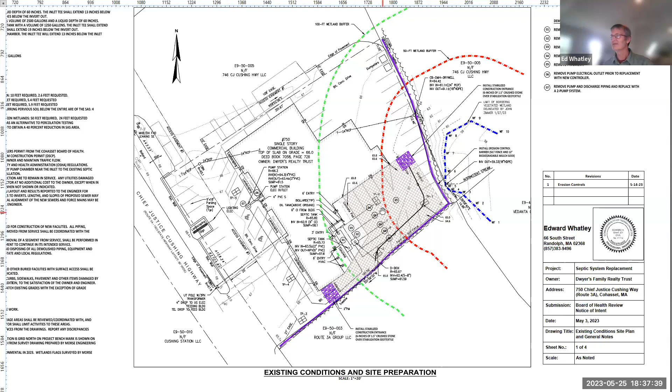And so, you know, we did run into lousy soils here, refusal at low and high groundwater over in this spot. And that's kind of why we were led down the road of locating the system basically in the same location that it's at now. And I'll just skip to the proposed.

In the proposed system, we're planning on replacing all the tanks. We're going to be adding a grease trap because there is a kitchen element in the butcher shop—not much, but enough that Pam asked us to go ahead and supply one. We're also using a Presby system, which is a method of enhancing the treatment. So that's basically it in a nutshell.

As far as erosion controls, there's potential for tracking on and off the site, so we're going to have stabilized entrances. We'll also have silt fence with a biodegradable compost mulch sock along the edge. That's it in a nutshell. I'm sure you'll have questions—I'll be happy to answer them.

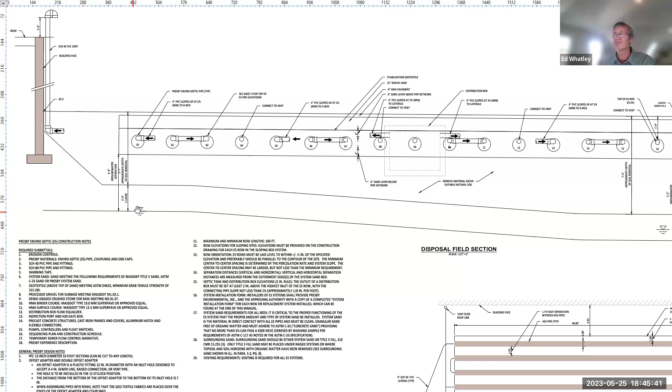In both locations. This part of the profile is up against the south wall of the building, and the groundwater is a bit higher there, then it drops as we move south. So we do have good depth.

As far as constructing the system, it has to be fairly deep in that it needs to support traffic, and so we do lose 16 inches of asphalt and gravel base.

So we did have to lower the system a bit, but in the end we have a little over 5 feet of groundwater separation on the lower end, and then 4 foot 4 inches on the upper end.

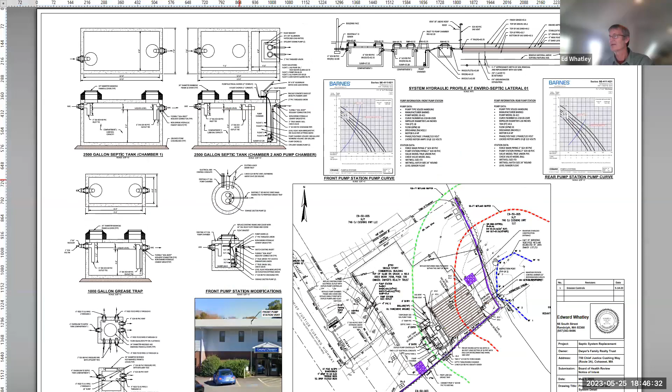Sorry to interrupt, but my concern is that the wetland's extent would represent the high stand of groundwater in the neighborhood, right? Otherwise it wouldn't be a wetland. And the contours here seem to indicate it's higher than you've estimated in your test pits.

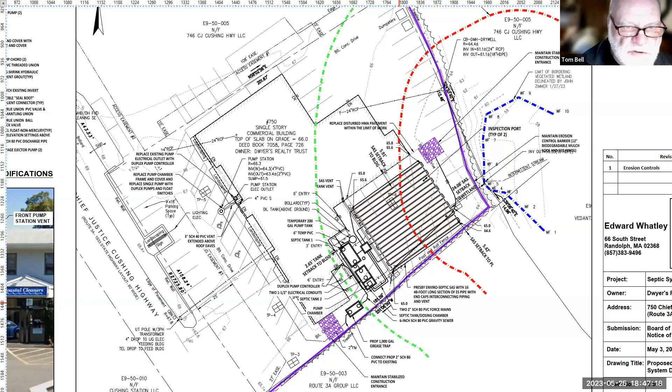Let's take a look. We've got a contour of about 60 and then 59 in here. I'm always suspicious when I see wetland delineations cross contours - that's not entirely realistic from a groundwater perspective.

Yeah, it's really a flag-to-flag line. I know all the compromises and hazards involved in using plants and very shallow estimations of whether you've got a hydric soil or not.

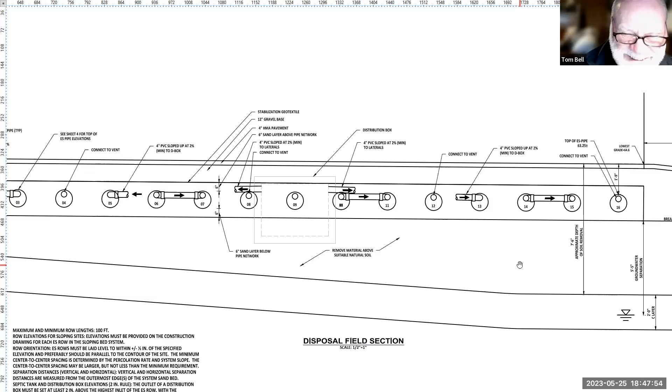But the fact is that water tends to be parallel to the surface of the earth, and if it's at a specific elevation in one place, it's got to be pretty much the same within the perimeter of that wetland delineation. We see this all the time, of course.

But in this specific case, it does not. I'm uncomfortable with your separation here. Do you have any pictures of your test pits? I didn't get a chance to read who the evaluator was or what they found. Did you do the evaluation of the pits?

Yeah, I did the evaluation. Phil Spath was on site with me - he's with the Board of Health, hired to oversee the test pits and shadow the soil evaluator from the applicant.

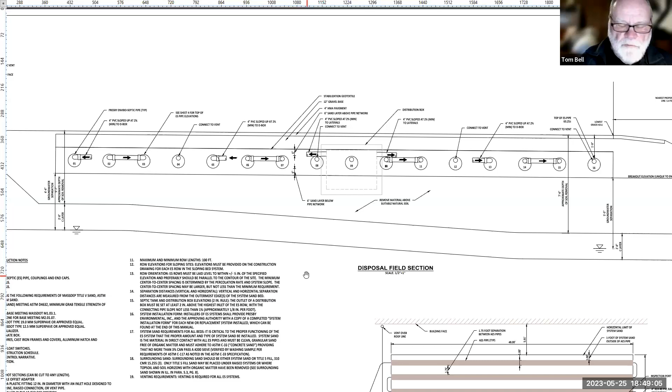I can pull up photos if that's helpful. You show a gradient here on your cross section - you want to go back? It's still there. You show a gradient in the water table here.

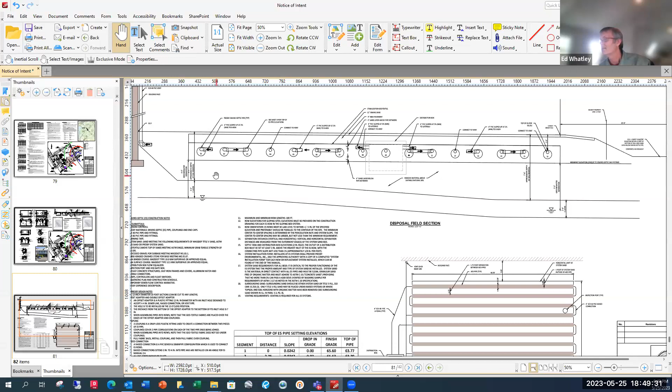Over a distance of - what is it from left to right here? About 40, 44 feet from end to end. And this elevation represents the groundwater elevation found in test pit 6, and this one represents the elevation in test pit 1. So what's the difference in elevation between the groundwater at one end versus the other?

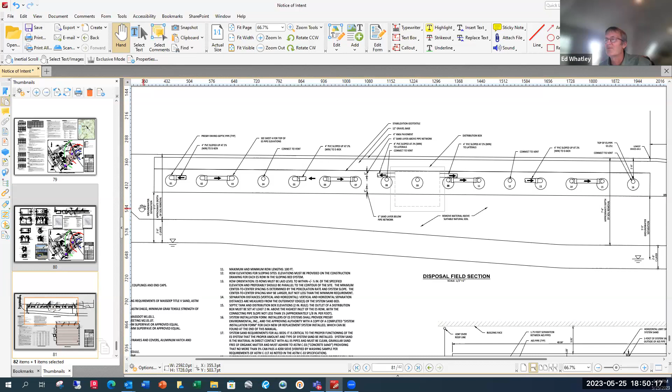If you could zoom in - I'm just estimating, it looks like about a foot. You've got numbers there, don't you? Yeah, there's a bit of a slope in the grade, but we've got about 4'4" separation from bottom of the field, to about plus 5'5" - so it's about a foot difference.

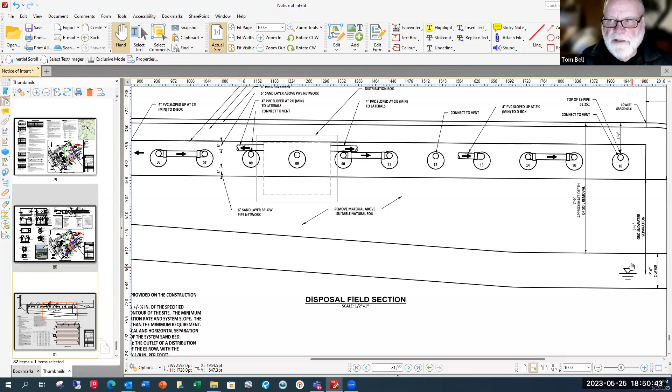I think we should be concerned about the separation here. I don't think you have as much separation. Either you have too little on the left side or too much on the right. That's a fairly substantial gradient over 40 feet.

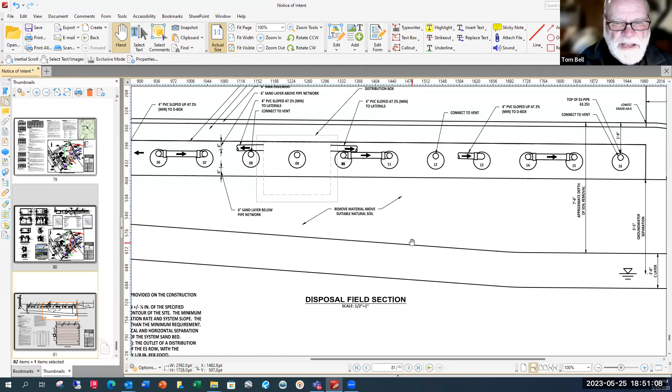Did you say the length of this is 40 feet? Yeah, that's like having a coffee cup on a table where the coffee's higher on one side than the other, if you will. It's basically just where we found the groundwater. We're not trying to represent this as a perfect gradient, it's just where we found it in this test pit, and where we found it in this one down here.

So 6 versus, I think it's 2. This elevation down here, at 6, we found the groundwater elevation at about 58.7, which jives pretty closely with what we're seeing in here. Yeah, and that's what we'd expect here. Moreover, it would probably be 58.7 across your entire site here.

Well, it is paved, so there's not a lot happening in here, nothing really going into the ground. But everything surrounding it is feeding into that groundwater. The water table over an area like this is flat as a table. That's the word, water table.

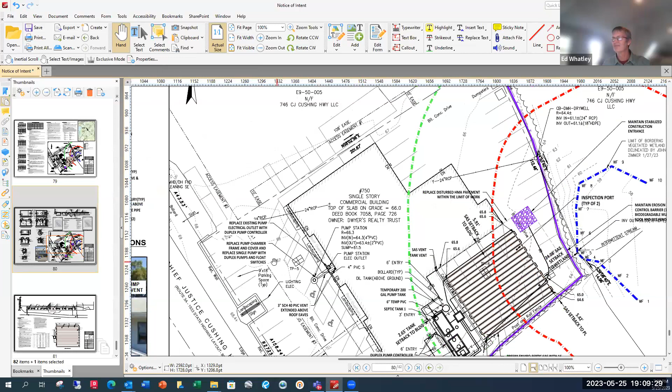Which would be an elevation of 61.1, pretty close, huh? Well, no, that would actually be about 63 and a half, but there's... I mean, you've got a building that I had heard from one of the sons they had to actually blast to get it in. So yeah, there's other stuff going on down here that is kind of toying with the groundwater level.

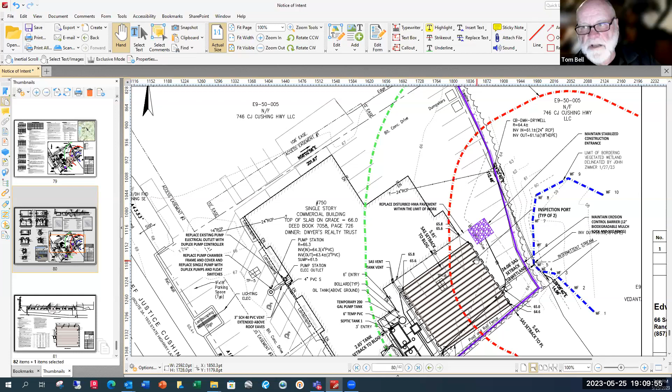We're coming off a hill. There's another Title V system over here. And so we might find higher groundwater here because of what's happening here rather than here. Well, looking at the contours, I mean, you are sitting on a high. The building is sitting on a high, it looks like, a slight elevation. And then as you move to the northwest, you drop down closer to the elevation of the wetland, within about 2 feet of it, actually.

So there may be a groundwater mound out there because of other infiltration chambers. But I'd still like to see at least some test pit, if it's only one in the middle of that big parking lot, but still outside of the 50. And we're so close here.

I would say leave it open for 5 days and then measure what the groundwater actually is. Mottling is a very imperfect way of determining the seasonal high groundwater. Very imperfect. Some soil mottles and some doesn't. If it doesn't have much iron in it, it's not going to mottle.

So Tom, you're suggesting further investigation in this area? Yeah. Let's see if we can actually determine that the area you've just drawn, Chris, is less suitable than the one being proposed, then we can move forward. But until we've condemned that area, until the engineers have condemned that area for one reason or another, I mean, I'm in favor of giving a variance here one way or another. But let's at least give it for the area with the least impact.

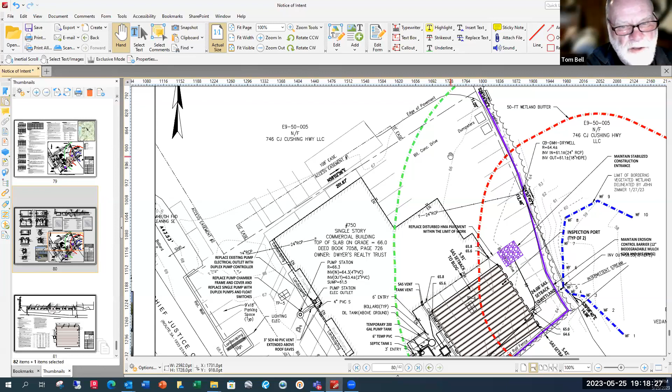I would suggest that if you can't keep it open that long, stab some perforated 4-inch PVC pipe in it, throw a little gravel around it, and wait a few days so we get an accurate measurement. We are close enough to the wetland here and the buffers that we need to find the best solution. We're not going to find a good solution, but we can find the best one, I think, with a bit more work here.

Ed, our next hearing is June the 8th, and the one after that's June the 22nd. I'd like to continue to one of those hearings. How much time do you need?

I'll have to schedule this with Pam and the excavator, so I don't know if we'll be able to make June 8th, but yeah, I'll try.

Well, let's agree to continue to June the 8th, and if there's a problem, you just let Charlotte know and she'll push it to the 22nd. Okay, all right.

Very good, thank you very much. Thank you, you guys.

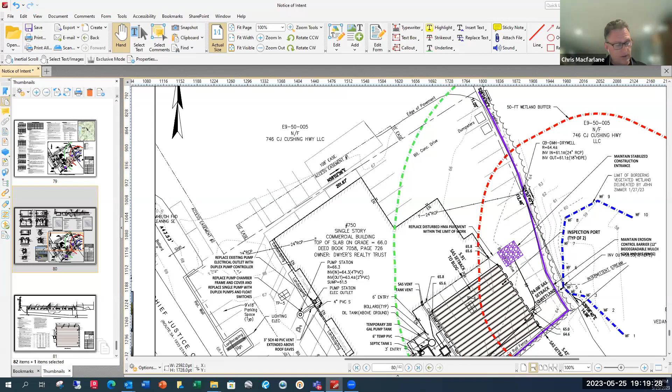Our next hearing this evening is also new to us, at 164 North Main Street. I'm going to read it into the public record. In accordance with Massachusetts General Law, Chapter 131, Section 40, the Cohasset Wetland Bylaw, Cohasset Stormwater Bylaw, the Cohasset Conservation Commission will hold a public hearing on Thursday, May 25th, 2023 at 6:30 p.m. via remote participation on the Zoom platform for a stormwater permit 23-09 from Hillary Moan to construct an attached garage, raised deck and stairs, and other hardscaping at 164 North Main Street.

Good evening, can you hear me? Hi, yes, yes, hi. So I believe we also have the builder here, Brian Greenberg. If you could promote him. Yes, thank you. Thank you. Okay, all right, so good evening, everyone.

This is a proposed addition to the single-family home at 164 North Main Street. Can I ask you to state your name for the record please? Oh yeah, my name is Xander Orm, Merrill Corporation. Thank you. Okay, sorry about that. And I have to share my screen.

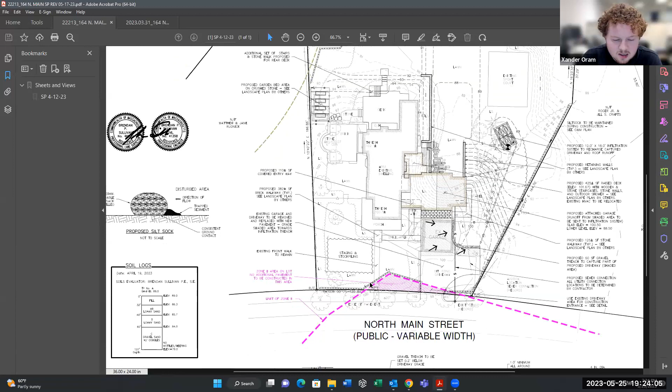We did a test pit at the location of the stormwater system and found very good soils, nice gravel and sand, so we expect a good infiltration rate. I believe that's it from me. If there are any questions.

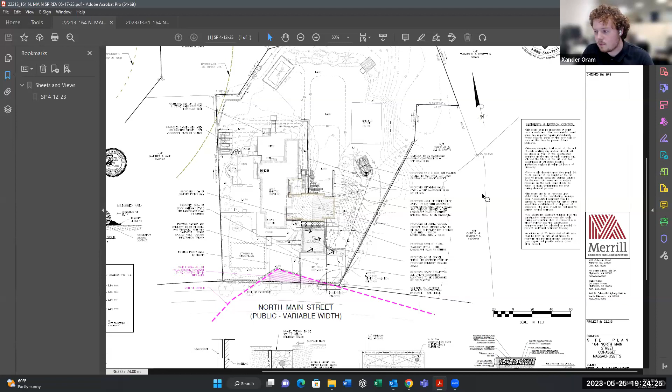Could you zoom in somewhat near the infiltration area? Not too far, just... Sure. Okay, is that good?

And what is the square immediately above that? Oh, that's a sports court, they have a sports field currently. It's like a basketball court. Yeah, no change proposed to that.

Do you know when that went in? Not personally, maybe the homeowners could answer that. They're here—believe it was previous to them owning the house, but Kerr or Hillary may know. Yeah, it was here when we bought the house in 2019. It was already installed.

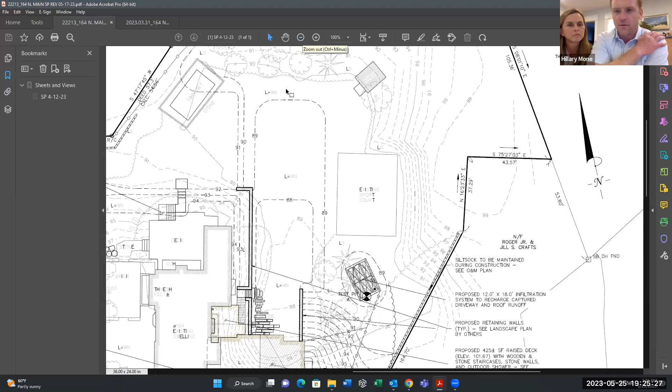So it looks like there's some trees there. Are they going to stay in place basically? These trees by the system, yeah, I believe the homeowners would like to keep those ones. Great, I think we discussed that.

Although you have a lot of grading going on there. There is a good amount of grading here, but if I zoom in, you can see it's about the same slope as before—we're not increasing the steepness at all. Yeah, but you're not going to be able to change the alignment of the grades without impacting the vegetation, nor can you dig your infiltration system without impacting it.

This is Sean Papich, Sean Papich Landscape Architecture, 222 North Street. There is going to be grading right in that area, and those particular trees are intended to be removed that are right near the infiltration trench. There's already a large low depression in that area, so it's actually serving perfectly for where that infiltrator is right now. But as you can see, right in that area with proposed grading, there will need to be some removal of those couple of pines in that location.

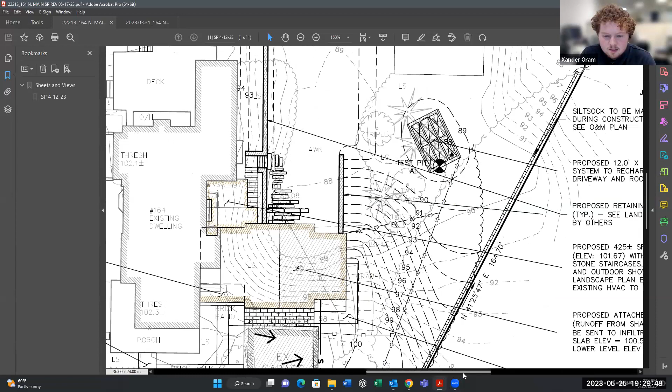No other comments, questions? How big are those pine trees? I'll have to look at that more closely, but there's nothing more than 12 inches being removed on site, so I can tell you they're definitely less than that—I don't think they're anywhere near that. Yeah, okay.

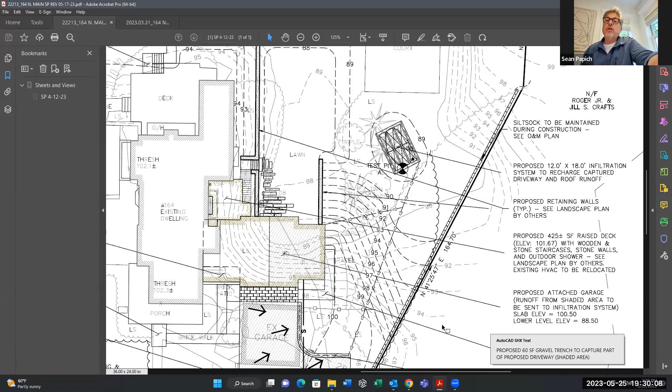We're proposing evergreens along the property line, as well as some newer river birch to replace the one we're removing.

If there's no other comments, I'll make a motion to issue a stormwater permit 23-09 at 164 North Main Street.

Do I have a second? Berrigan, second. Having a motion and second to issue stormwater permit 2309, take a roll call vote. Tom Bell, aye. Kathy Berrigan, aye. Chris McIntyre, aye. Chris McFarland, aye. That vote passes 4-0.

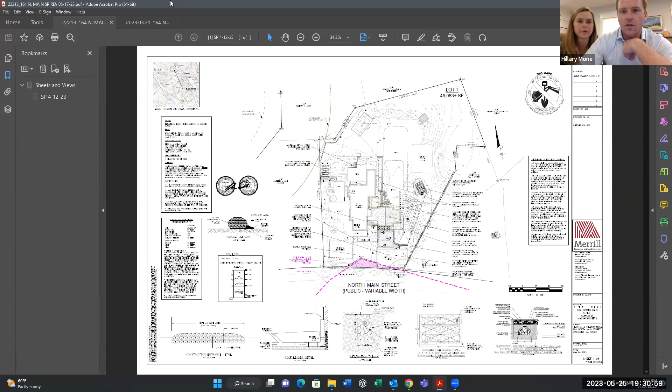Okay, our next hearing this evening is also new to the commission. I'll read it into the public record in accordance with Massachusetts General Laws Chapter 131, Section 40, the Cohasset Wetland Bylaw and the Cohasset Stormwater Bylaw. The Cohasset Conservation Commission will hold a public hearing on Thursday, May 25, 2023 at 6:30 PM via remote participation on the Zoom platform for notice of intent 23-15 for the town of Cohasset's DPW and engineering to present Government Island Wharf improvements at 15-19 Lighthouse Lane.

So the other folks just pulled up their plans. I have history and alternatives in a presentation. If you want me to just start like that.

Sure, could you start with your name and your affiliation? Yeah, I am representing the town of Cohasset. My name is Jimmy Hill. I work for Foth Infrastructure and Environment.

Jimmy, you can share your screen if you like, if you want to pull up the site plan or any other documents you want to share. Sure, I'll just go through a presentation. I'll pull up my site plan. Okay, thank you. Everybody can see the screen. My pointer, I'm going to minimize this.

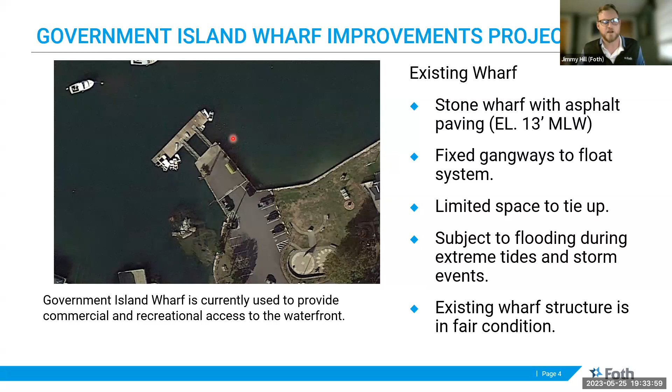The wharf in today's condition is comprised of the original stone wharf, two fixed gangways that anchor the float system. Currently, there's only one berthing space along the wharf itself at high tide. The wharf is also subject to inundation during events that combine a high tide with nor'easter driven storms. These events render the facility sometimes unusable. During low tides, rock obstructions in the wharf vicinity hinder vessel access. Primary use of the wharf is commercial fishing, but it also supports recreational users.

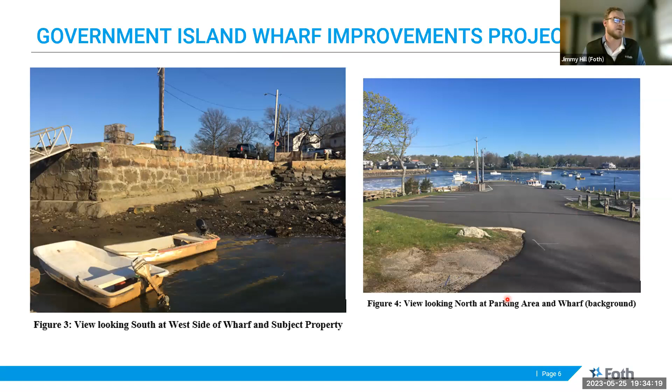Some images of the wharf in today's condition. See the two fixed gangways here, the small float system. Another view from the float system here as we look south at the west side of the wharf and the subject property, and this view from the parking area.

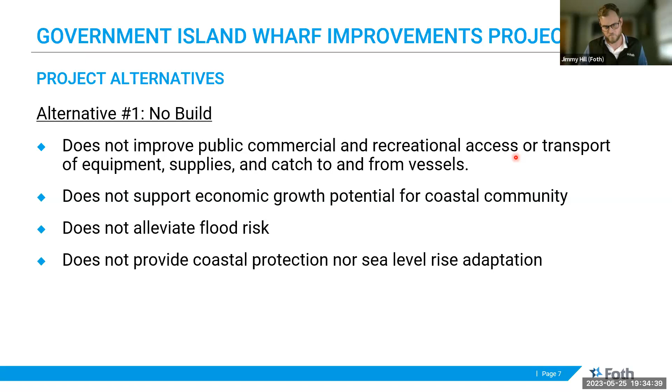The first alternative we went through was the no build. The no build scenario does not alleviate the flooding that occurred, nor does it alleviate the potential for damage and resulting debris caused by flooding. This alternative does not support Massachusetts climate resilience and sea level rise adaptation efforts. Based on the above conditions, the no build was not considered viable.

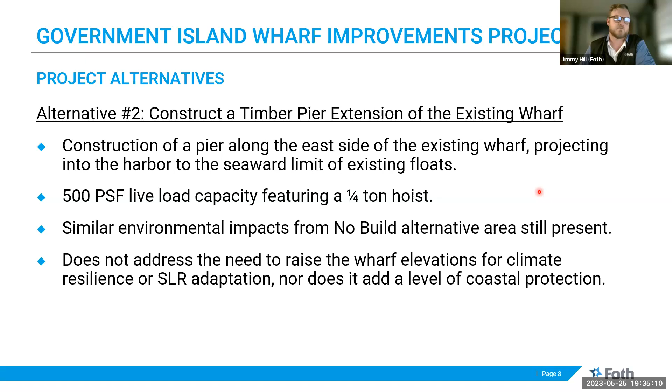The second alternative we considered was to construct a timber pier extension adjacent to the existing wharf along the eastern side. Similar environmental impacts as the no build alternative result from continued flooding during coastal storm events and high tides. Under this alternative, the wharf would remain at the existing elevation and grades, which does not address the climate resilience or sea level rise adaptation needs.

So the final proposed alternative that we submitted with the notice of intent is designed with current and future uses in mind and minimizes impacts on the surrounding environment. In this alternative, the wharf will be raised about 3 feet by constructing a concrete retaining wall set on top of the current wharf, filled with structural fill, and repaved to an elevation of 16 feet mean low water. The timber pier extension, supported by steel pipe piles, would be installed to the north and west of the wharf with deck elevations to match the 16-foot mean low water wharf.

New floats, a larger ADA accessible gangway, conveyor system, and two quarter-ton jib cranes would be installed to improve facility use and access. This alternative also addresses climate change and sea level rise concerns using the Massachusetts Coast flood risk model for the 2050 planning horizon.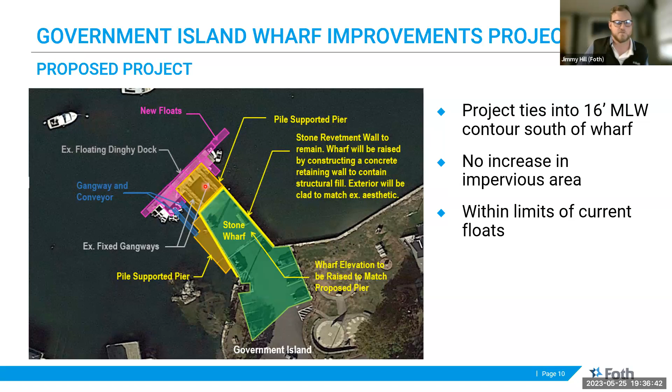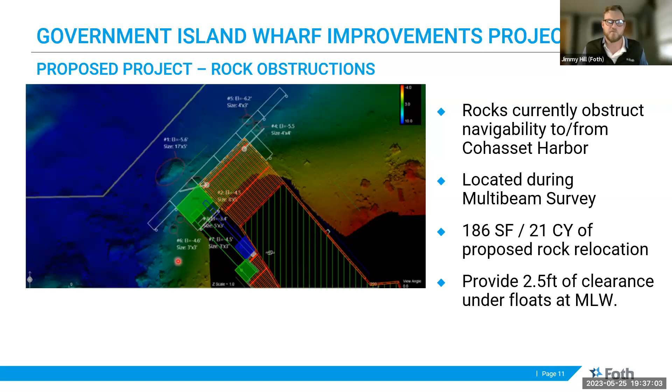The harbor master had noted several rock obstructions limit access during lower tides. As part of the project, the rocks are located using multi-beam sonar equipment. A total of 186 square feet of rock, amounting to 21 cubic yards, would be relocated to a nearby area west of the wharf to provide better access to boaters and give the floats 2.5 feet of clearance at low tide.

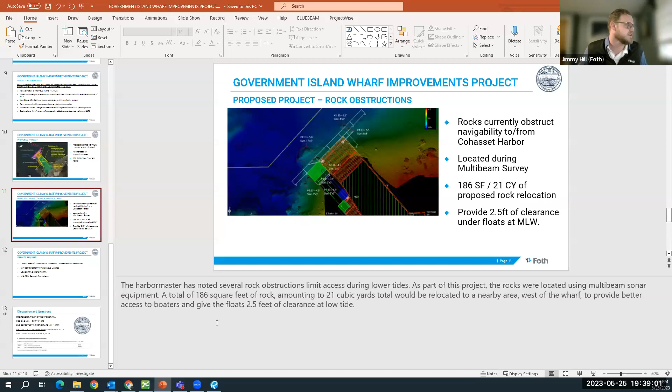With respect to the rocks, how do you know they're rocks and not attached to bedrock? The multi-beam data showed - you can kind of see right here it might take a little bit more investigation, but the rest are kind of just pocket rocks. The site photos, this one in particular, kind of show you what's going on out there in terms of those rocks. A lot of it's just kind of scattered.

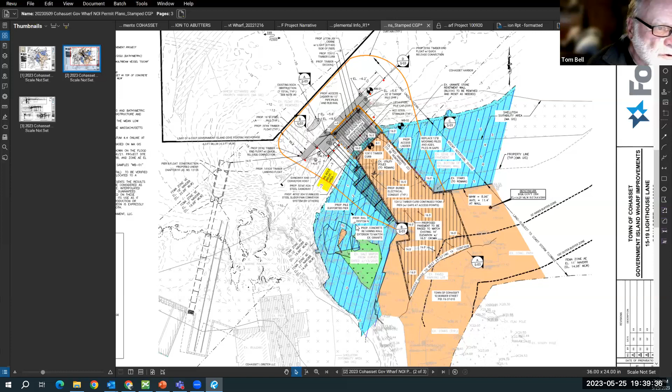I'm sure you're aware that the rock on the north side, or east side of the structure, is quite large and it's clearly bedrock. Correct, yep, we're aware. So how are you going to deal with that if, for example, the one at B S-03 is in fact a bedrock outcrop?

This one right here that I'm highlighting? Yeah, that one. I think we may need further investigation, and it could be removed with an excavator or crane potentially. Well, you're not going to lift it out if it's an outcrop - you're going to have to chip it or blast it or something.

To reduce its size or elevation? Correct. So we proposed maybe a hydraulic ram then, in the case of harder rock like that, bigger pieces that can't be picked up, where we could break it into smaller chunks. I don't see the benefit of blasting out here. We didn't really talk about that too much. That's a tough one.

So if you raise it 3 feet, the gradient of those walkways is going to change a lot. Correct, and we looked into the slope of the gangways at maximum low tide. That's actually why we increased the length of the gangway to, I believe, 50 feet. We had secured one that was 40 feet, but it was kind of too steep, so we ended up with the 50-foot gangway.

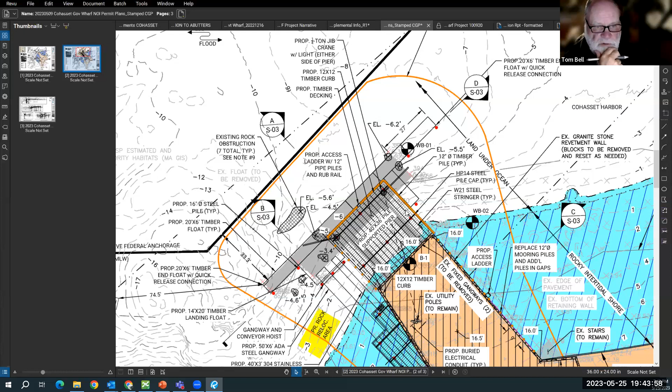I don't know whether you're aware, but on that northeast side of the pier, this is where the lobstermen haul their boats at high tide and prop them against the existing seawall to do maintenance. So if you have that extension there, I guess they'd have to remove it to be able to do that during the winter when they do it?

No, not necessarily. This face of the wall, the wharf right here, is going to remain about the same. We've proposed a few additional mooring piles there so that they can still use this section. In the photograph, it's hard to see, but this vessel is adjacent to the wharf, tucked into this part by the parking lot. It's about right here, but there's not really enough space right now for more than one boat to do that. This gives it a little bit more room, maybe two of those size vessels can fit here.

Yeah, but what I'm looking at is the approach to that, if the float is extended to the northeast, then how do they actually get in there? I believe you just have to come around it. And if it's an issue with the users, then I think the harbor master would be happy to break that.

Yeah, so it can be removed so that during the winter those guys can get a straight shot, because it's a tight spot and there's a big rock there, a big outcrop they obviously can't land their boats against. There's just a narrow, maybe 10 or 15 feet of gravel between the northeast seawall and that outcrop, and they don't want to set their keels on that outcrop. So they need to come in there parallel to that seawall. They can't come in and make a sharp turn into that.

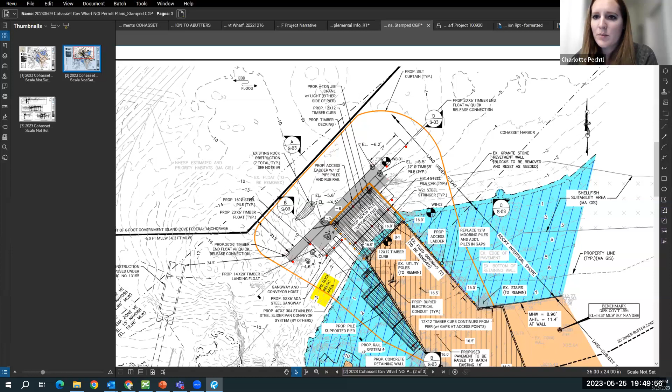They also were given copies of the site plan as well. We did encourage them to come to the meeting. I don't know if I see anybody on the call who we saw at the docks, but we did encourage them to come to the public meetings, and it'll also have to go to select board too.

I think those pilings would be an easy thing to miss with all that's going on in this diagram, right? Like typical engineering drawings we get, there's a lot of stuff on it, and if they're not accustomed to looking at an engineering drawing, they could very well overlook the fact that there's suddenly going to be 3 new pilings out there that they've got to somehow thread the needle to get back into this only place where they can really maintain their boats.

So I would go so far as to say that these should be pointed out to them and ask them what they think, not just 'hey, look at the plans, do you approve?' What happens if we put these 3 pilings in? I think you might get some useful feedback from that.

Okay, yeah, I'll comment that Lori Gibbons, the harbor master, has been going back and forth with the community there for years, maybe 5 years or so. This plan came from 'let's utilize this space, let's not encroach further out towards the anchorage, we're adding more space, more features for folks to use.' So maybe that had been missed, but the design was only intended to add more space and not to limit the uses of this wharf. It's really intended for folks to use it to make money.

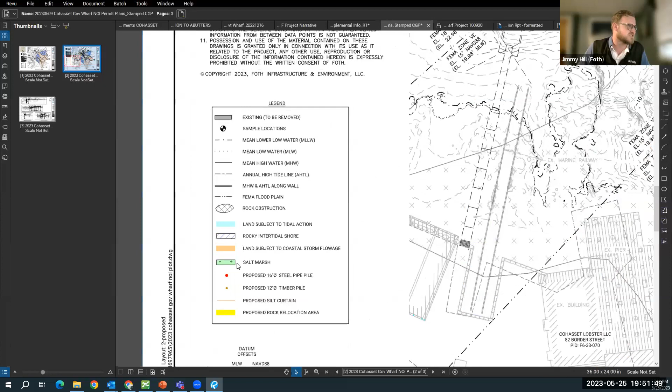So is the tan color all asphalt or is that just terra firma? This tan color we're using to show the land subject to coastal storm flowage within the project area.

Okay, so what is the limit of the area that's being raised? The limit is this cross hatch here, the slanted hatch. And does it all have a perimeter wall around it? I believe there's proposed to be a small granite-topped curb through there, which will kind of extend the aesthetic of the top of the concrete, or the top of the wharf retaining wall.

Those words don't quite work together - the granite and the aesthetic of the concrete. It's not my purview, but it couldn't be a worse thing to do to the harbor of Cohasset than to put a concrete wall on top of a 200-year-old granite wharf. Whoever proposed it should be ashamed of themselves. They could face it with granite - they could use granite, how about that? They could do that too.

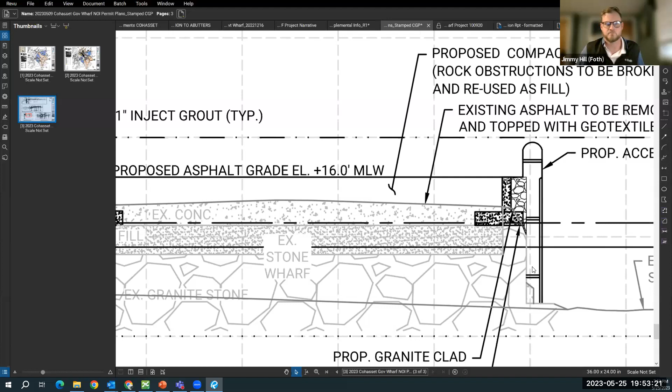So this cross section here shows the retaining wall with granite clad on the outside to match. Okay. And yeah, the idea is that the retaining wall holds the structural fill, sends the loading force inward rather than out towards the wall. Okay, full reconstruction of the wall.

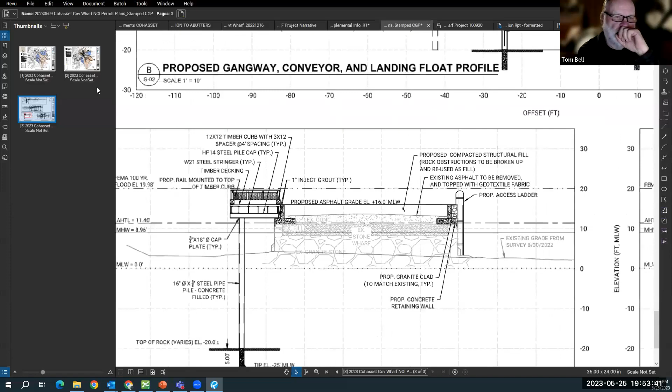Go ahead. So going back to the plan where you said there would be a small granite curb, the intent is that there is still circulation between the parking lot and the adjacent property, is that correct? By circulation, like people can walk from the park to the parking lot and back and forth as they currently do. Right.

Well, is that really the case? Because you're 3 feet higher. So what happens when you get to that edge, how much higher are you going to be? Right, okay, I see what you're saying here. Yeah, so there needs to be an access.

There needs to be a step down, or 2 steps down. Well, it can't be steps, it has to be handicap accessible. I mean, even the lobstermen take their dogs and play in the park here, and vice versa. People come from the park and they walk out to the wharf.

So there needs to be some accessibility. Okay, understood. I mean, if you had a long step, then this maybe came out several feet and had tiers down, and you're saying handicap accessible as well. So we need to incorporate a smooth path up.

Yeah, I assume since this is a town project, that eventually it's not just the fisherman's wharf which would become improved for resiliency. The community boat club would be the same, and the rowing center would be the same. It would carry all the way down. But in the interim, if it's going to be done piecemeal, then it shouldn't...

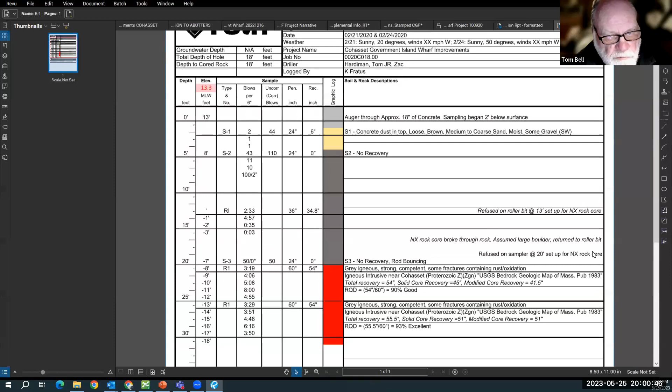Okay, so was this auger coring or augering down? How did you drive it? Split spoon, 5-inch, you did rock cores. Split spoon sampling through sediment, then switch to diamond drilling to get core? Yeah, that's correct. Roller bit, 5-inch rock coring was performed.

Okay, 2020. Let's see what else we have. And then on the wharf itself, there was some test boring done as well, which determined that underneath the asphalt and poorly graded sand, there were some broken up pieces of granite.

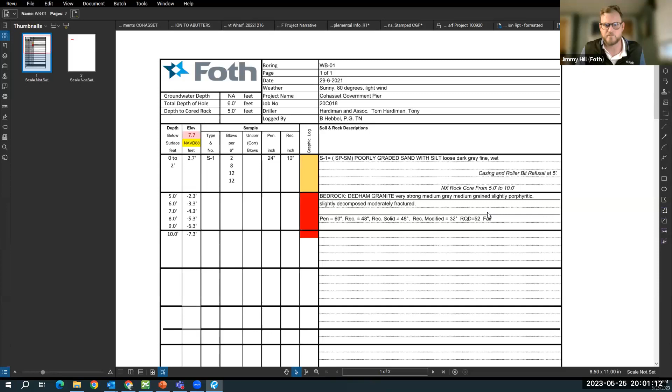Can you comment on the wisdom of sealing the seams between this gravity stone wall, cutting it off from natural groundwater drainage? Don't we have an issue with groundwater damming behind these walls that have had shotcrete, plugging them up so you've got hydrostatic pressure at low tide? I know all of these have been grouted. It just seemed like a really bad idea to me.

We did have an inspection done of the current condition of the wharf, and it was determined to be in fair condition. So the structural engineers designed this with that in mind. So you don't think the damming of groundwater behind all that grouted stonework, creating hydrostatic pressure at low tide, is an issue?

I can get into that with the structural engineers. I guess the possibility exists for that. It just seemed like a bad idea to me, damming up groundwater behind these walls by sealing them. It didn't add any structural integrity to them.

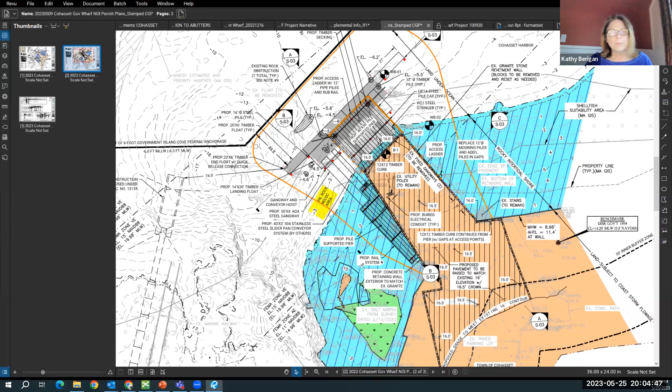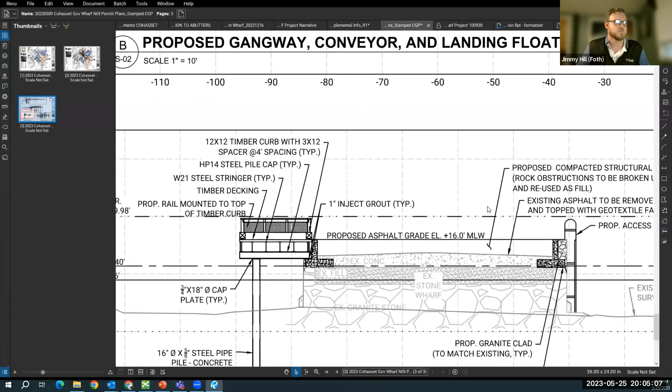So just some compacted structural fill. What does that mean specifically, like concrete? I think we'd use like, yeah, concrete or some sand rock. Probably, it's probably going to be a graded crushed stone. Thank you. Okay.

So all of these are elevations referenced to NAVD 88, is that correct? I just mean, Joe, mean low water on the plans. It's mean low water. I see. Mean low water.

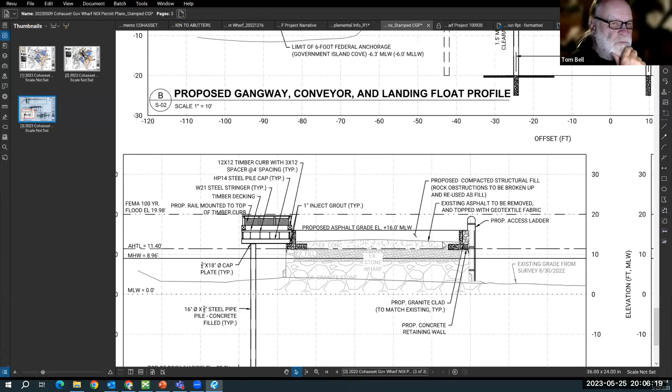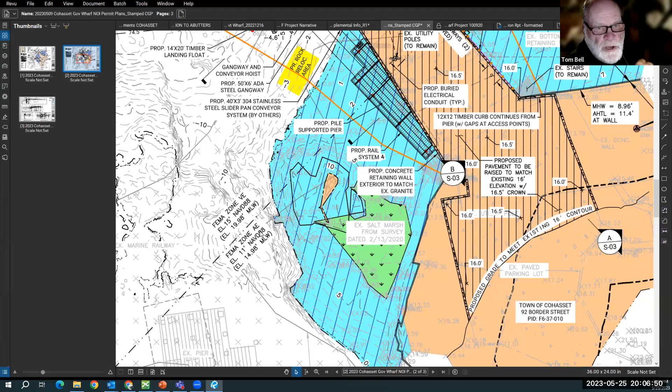Okay, so if these other elevations on your map are referenced to mean low water, then this doesn't make a lot of sense, because you're going to be at a lower elevation than the velocity zone. Well, there's not much higher than you can build. You can't build a 20-foot tall structure out there and have the gangways still work.

Again, you're using two datums here. One's mean low water, one's NAVD 88, and they need to be consistent, I would think. We're concerned about this being above the velocity zone, right? And at 16 feet, that would be the elevation. If the elevation would be another 5 feet higher relative to mean, essentially, if you subtract 5 feet from all those 16s and 16.5s, you're down at 11.5.

So you're lower than the elevation of the VE zone. There's only a certain extent that you could build to before. I mean, you want to be at 16 feet NAVD 88, right? You want to be a foot or so above the velocity zone, but you're relating these to mean low water, which is lower in elevation than NAVD 88. NAVD 88 is approximately within half a foot of sea level. Mean low water is below sea level.

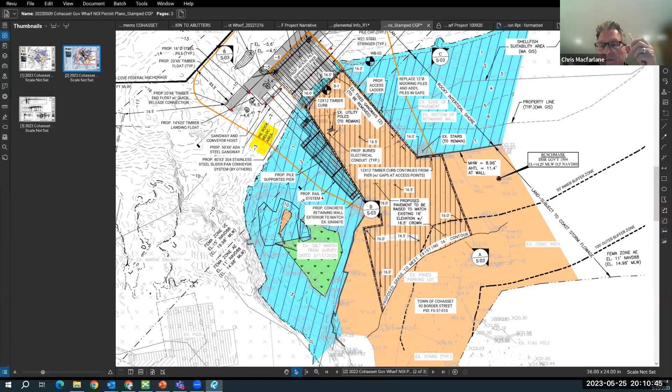So the existing contours are being shown from mean low water? Correct. The ones below sea level are, but what about the ones on the land, would the wharf be the same? Yeah, they are also. That's not right. You can't do that. Sorry, I missed that.

Well, your terrestrial elevation should be referenced to WGS 84 or North American datum, I can't remember the name of the terrestrial datum that all elevations are referenced to. These days it is NAVD 88, but historically they haven't been that way. So you're saying it's a little confusing to see two different datums on the same map.

I think the idea is that FEMA zones are spoken of in NAVD 88 terms. So we provided both, the mean low water, which is the plan reference shown in the datum chart to the bottom left, so that you can see the relationship between mean low water and NAVD 88 when we're talking about the flood zones, so that we can talk about our design.

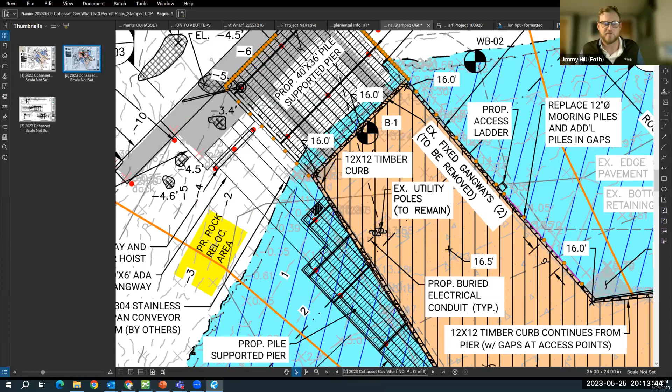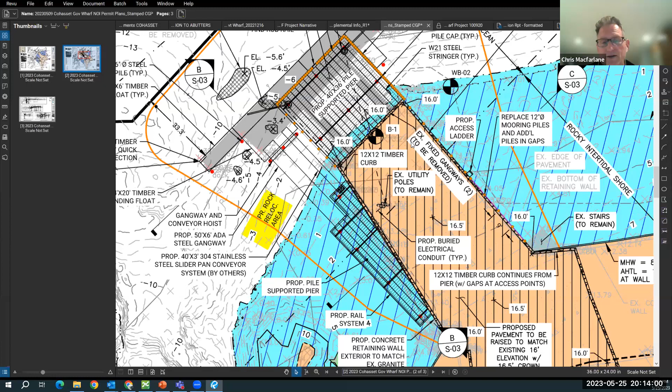From the top of the wharf, 13 feet down. I haven't stood down there myself, but looking at the photos, I'd think that's close to mean low water. I'm not saying that's incorrect, but if you stand at the end of the wharf and turn around, it seems like it's a lot more than 3 feet by the time you hit the road up above. It's got to be close to 5 or 6 feet.

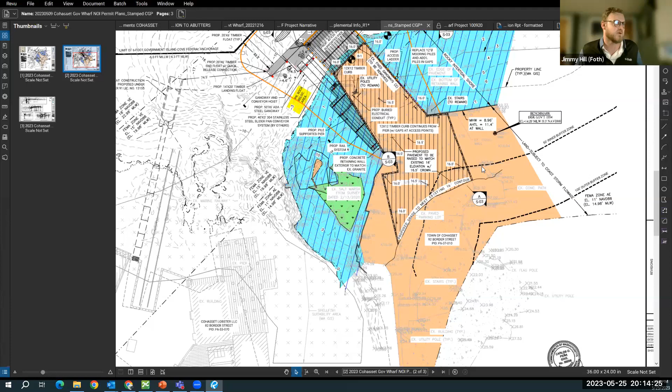To where, because right where it says existing 16, there's a road that runs up there. Right, a little further up the hill. Yeah, we're kind of going halfway through the parking area with that contour, so it is a little further up the hill.

Isn't the road right where that call out was? Isn't it right where that A is? Isn't that the road right there? These dash lines are the buffer zones. No, but see, you see a contour cut the other direction right there, see where it says existing concrete path?

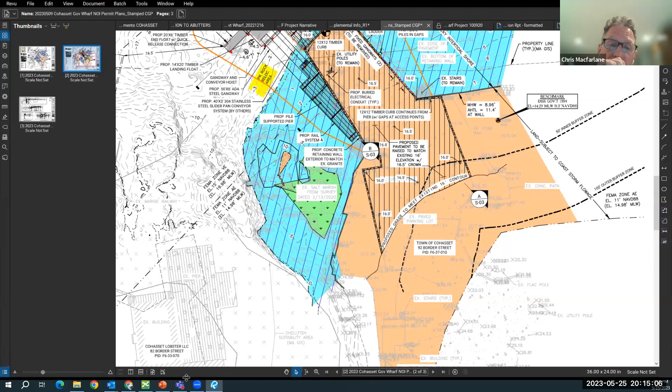Isn't that the road, or no? Sure, right, a little bit to the outside of this photograph, so I think from that 16-foot contour, it looks like it's going through here. So the bottom of that wharf, the seaward side, at least where the asphalt stops and it looks like there's concrete after that, is about 8.5 feet above sea level.

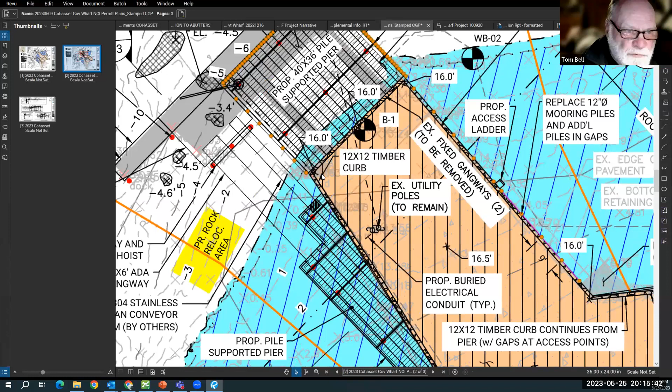A little bit farther back from that, maybe, yeah, right in there. That's about 8.5 feet, its elevation. Well, then that would make sense, Tom. If you add 3 to it, you're at 11.

Yeah, that's right. I know this is all driven by regulatory nonsense, but it can be confusing here. We're looking at elevations that are referenced to one datum for topography and another datum, in some cases, for the mean low water, which doesn't make a lot of sense, but that's just the way our world works, I guess.

It's found it's just easier to show both in scenarios where there can be questions and scrutiny like this. Maybe sometimes it aids the conversation. It appears here it didn't. I should have just left NAVD 88 off the plan.

Well, I'm glad you didn't, because I was under the assumption that we were talking about NAVD 88 and envisioned this at 16 and a half feet, and so therefore it was about 1.5 feet above the VE zone. In fact, it's underwater in a VE situation, quite underwater - like 4 or 5 feet underwater.

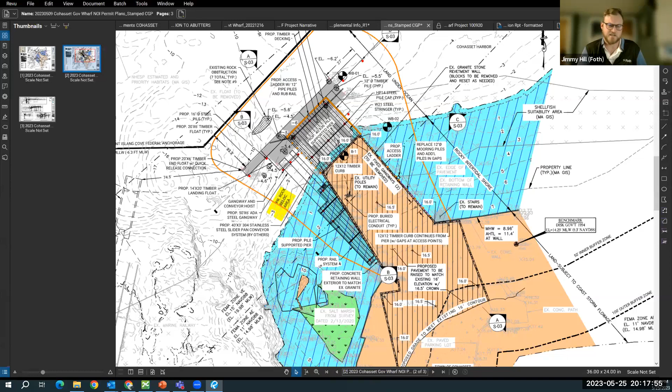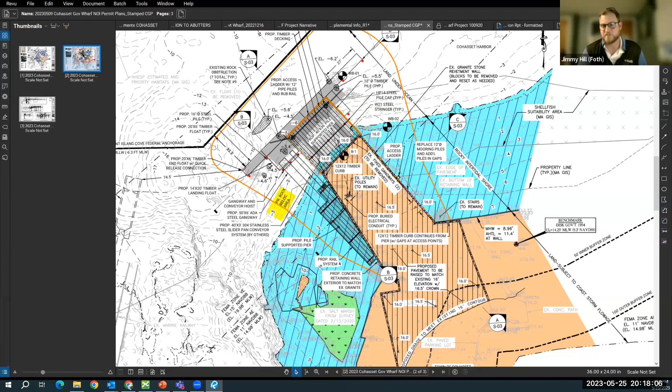Oh, it's not. I attended the FRM training - I'm not sure if you're talking about the same thing. But yes, of course, I looked at the models for this site, for all of my sites. It looks catastrophic when you really see it.

And that doesn't even take into account - well, the model does take into account, but in general we're looking at current conditions. 2050 is going to be a completely different story. So it's good to hear that you've left some ability to put additional courses of stone or raise the elevation yet again as necessary, and we all know it's going to be necessary. Right. Some people don't believe it, but I think most of us here in the commission do.

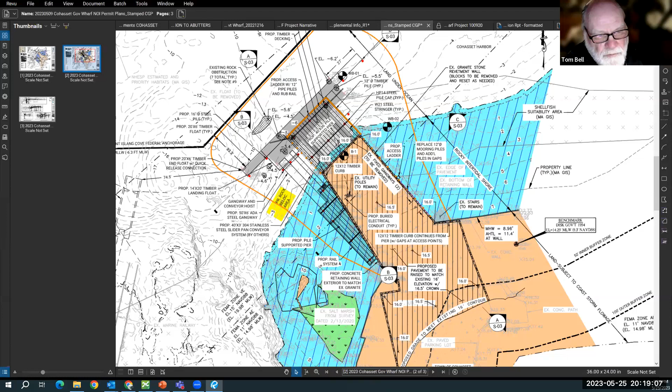Okay, well, I'm just happy - it all sounds very arcane, but I hadn't noticed that all of this was referenced to mean low water. So now we know.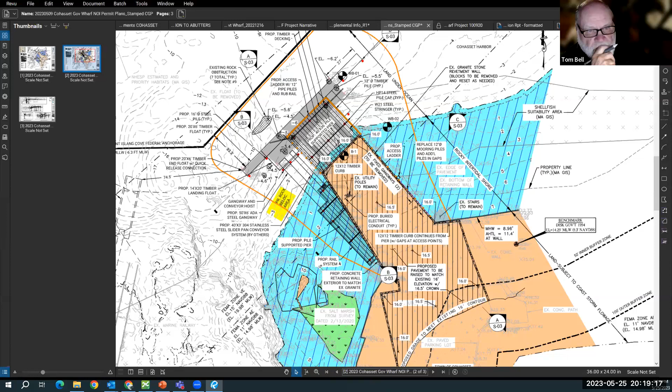Okay, so we all have a little bit of homework to do. I'd like to continue this hearing for NOI 23-15 until June 22nd. Is that okay with you, Jimmy? Believe so. Yes, okay, June 22nd it is. Thank you very much. All right, thank you.

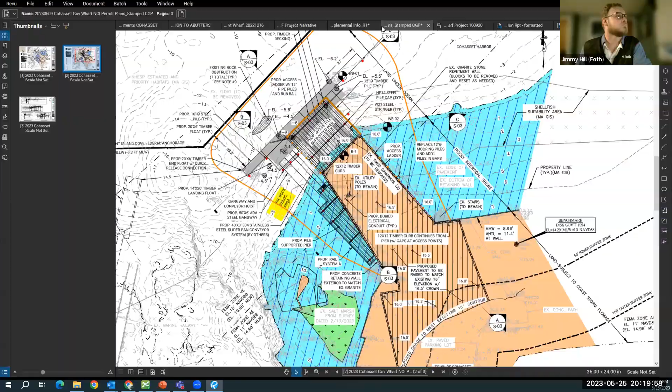Okay, our next hearing this evening is NOI 23-13 and Stormwater Permit 23-07 at 83 Spring Street. This was continued from May the 11th. This is the Juan property.

Evening, everybody. Good evening. Good evening. Good evening.

So I'd like to compliment everyone on being so civil last hearing. I thought it was a nice discussion. I'd like to start off this evening just by reading from Cohasset Wetland Regulations, Section 27A1, the inner buffer zone.

Inner buffer zones consist of not less than 50 feet, and serve a number of important functions in relation to protection of resource areas. These include providing a protective buffer between human activity and development and resource areas, and providing an area to absorb, capture, or dissipate eroded materials or pollutants coming from sources further upland, thus preventing or mitigating their impact on the resource area.

Providing flood and storm damage mitigation, stormwater control via water absorption capabilities of and protective barriers provided by trees and other vegetation, acting as a groundwater recharge area, and a protection area for water quality, providing wildlife habitat areas, travel corridors, and protection zones, providing aesthetic value and recreational value. The concern regarding activity within the buffer zone is the ultimate impact on the adjacent resource area during construction and subsequent use of the project.

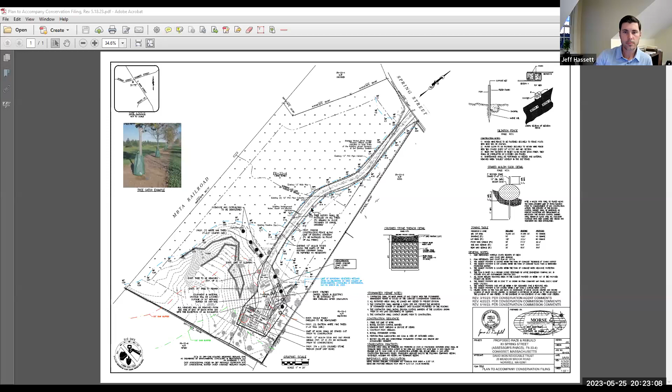So this is the plan that we submitted following the last meeting. We are now proposing the house entirely outside of the 50-foot buffer, which is that red line. We're at 63.9 feet from the wetland, as opposed to the existing house that's 25.3.

One of the big concerns we had was whether we'd have any issue with ledge when extending the utilities from the existing house back to the new location. That appears to not be an issue. We did 2 test pits, one located right here and the other here, on either side of the utilities, and did not encounter any ledge.

We also excavated a 3rd test pit in the back right corner of the house where the grade comes up, to see if we were going to have any issues with ledge in that corner. We got down deeper than the slab elevation without hitting any ledge, so there really should be minimal, if any, ledge removal for this project. So that was good news.

The other thing we talked about was the removal of this 30-inch tree. We had a driveway configured in a way that would have required it to be removed. We've adjusted that driveway, and now we're preserving it. With the alternative, keeping the existing footprint, we thought that tree needed to go because of the proximity to the house, but we're comfortable with it in that location.

And then lastly, we added additional trees in this area where the existing home is being removed - that home and deck are being removed, along with an outbuilding and an outhouse. In the location of those structures, we're proposing now 3 eastern white pines and a total of 7 white oaks.

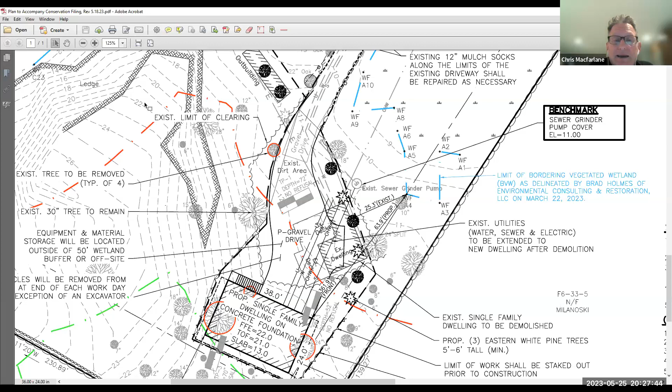Besides the trees, I think it would be wise for the area of disturbance, where obviously a big portion is the existing structure and the new driveway, but the area that's not should receive some sort of mitigation planting. In addition to trees, a seed mix, and shrubs—a shrub layer, ground cover layer, something to stabilize everything that's been disturbed over time. So in the area where the existing house is being removed, but beyond the limit of the driveway, we can enhance that further with a seed mix. Basically any area of disturbance, any area of concern.

So is the idea, Jeff, that all the contours on the left side of the house just run into the foundation? Exactly, yes. To elaborate, you have an existing 13 contour running right in front of the garage, and we have a garage slab at elevation 13. The foundation wall will extend up at a height—it will be variable, but there won't be any fill brought around it, it's just matching existing grade. What about the material that's taken out? It'll be put on a dump truck and hauled away.

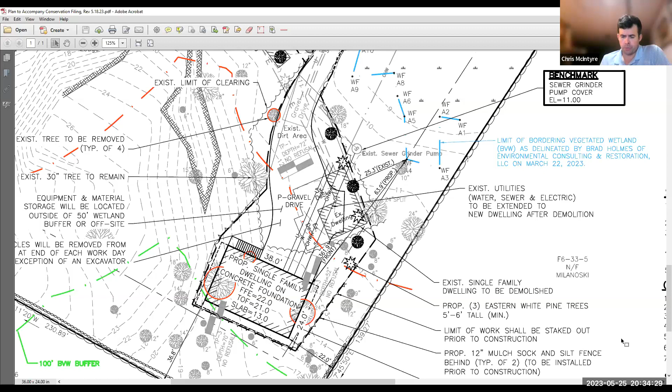And finally, I make a motion to issue a stormwater permit 23-07 for 83 Spring Street. Do I have a second? Second. Having a motion and a second, take a roll call vote.

Tom Bell, aye. Kathy Berigan, aye. Chris McIntyre, aye. Chris Macfarlane, aye. That vote passes 4-0.

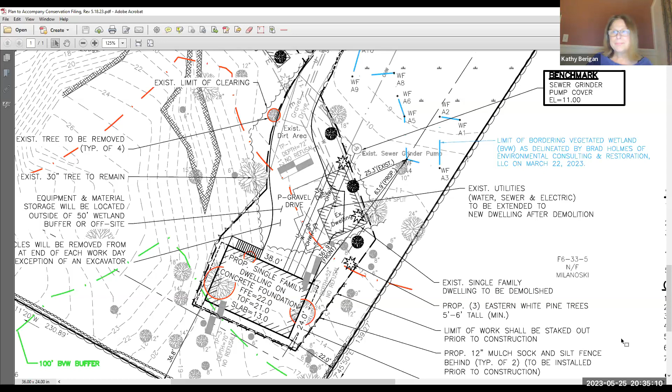Okay, Jeff. We seem to have one certificate of compliance for this evening. The other two have been continued. We have NOI 19-15 and stormwater permit 19-18 for 187 Atlantic Avenue.

Take it away, Charlotte. Yes, and we do have, I believe, the previous owners but current permit holders. We have Robin and Lynn Schwant on the call.

Following up from our last conversation about this COC, the commission had expressed some concerns about the drainage pipe going into the wetland. It seems to be a sump pump pipe, and there are actually two that the engineer has now located on the as-built, which I can pull up momentarily. We wanted clarification about the history of this pipe, if it was already existing on the site, why it was installed in this location, and if it's potentially possible to relocate it.

The other concern was removing some hydrangeas out of the landscaped area in front of the entrance, and those have since been removed. Also, to clarify with the commission, we're in the process of recording the long-term operation and maintenance plan for the stormwater management systems for this property. That will be done prior to the issuance of a stormwater permit COC, but they are prepared to take care of that. I can pass over to either the commission or the Schwants to see if they have anything else to add, but I believe those were our concerns from the last meeting.

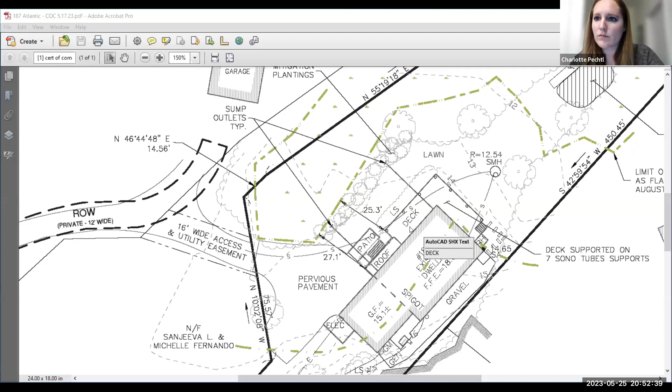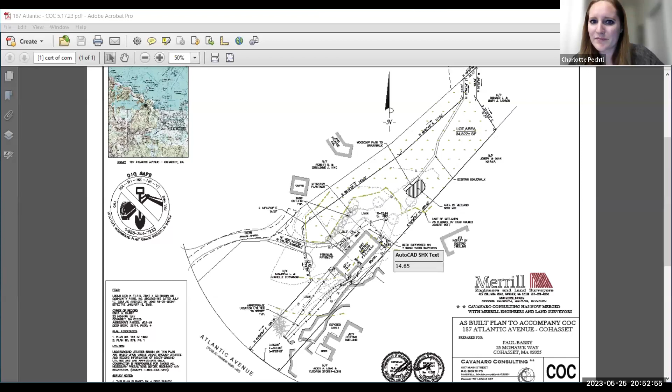Can you go back to the plan for one minute please? Yep, the as-built? Sure, okay. Can you zoom out? Yep. A little more, zoom out more? Yep, maybe, is that okay? Yeah.

Charlotte, I just want to point out that immediately adjacent to Atlantic Avenue is the area that was added to that area. Mr. Schwant, I don't know if you can comment on that.

Well, it was an attempt to get some vegetation and remove some low-lying areas that were holding seasonal stagnant water that was objectionable to our neighbors. So we did fill a couple low spots, and there was some thinly spread loam in an attempt to get some seed to germinate. It's probably too late now, the trees are gonna die in that area. It's more loam than you think, trees can't withstand that.

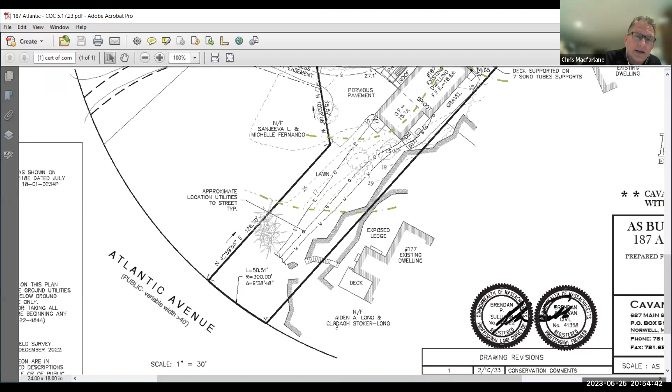The objectionable standing water probably was another wetland. It probably shouldn't have been interfered with. I mean, Charlotte, I don't know if you ever...

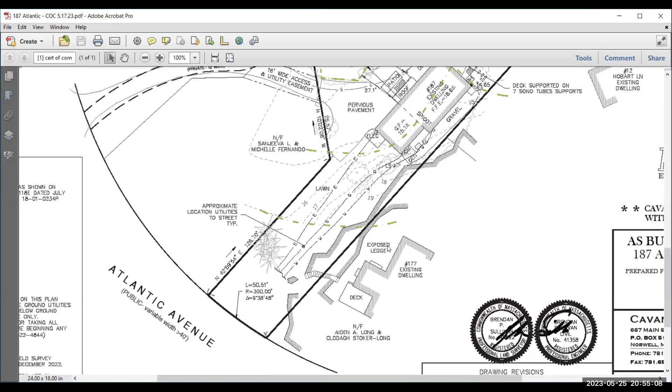Well, I can speak to that. In terms of the history of it, actually, there was no standing water on that property prior to the development of, I think it's 183, the Fernando property. When they built their driveway and built a slope up to the house, all of the water on that part of that property came down the hill into that area that, prior to construction of that house, there was never standing water.

Yeah, their driveway's right there, so there was a lot of runoff from the driveway down into that area. And I believe on some of the trees in there, the contractor did put some tree wells around those trees. Yeah, we actually were alerted by a neighbor, and maybe incorrectly, but it was the standing water around one or two of those trees that was being objected to by the neighbor, claiming that in fact is what was killing a tree or trees.

I'll just note too that, at least from what it looks like, and anyone please correct me if you think differently, the area here where the loam and seed was installed and the fill was brought in appears to be outside of the 100-foot buffer to the wetland, between the Schwantz and the neighboring property.

However, there is an isolated vegetated wetland that's across the street. Just for reference, 136 Atlantic Ave, where we had recently approved a project, is just over here that had an isolated vegetated wetland going up to Atlantic Ave. But as we know, that only has a 25-foot buffer. So if it was a 100-foot buffer, this area of disturbance probably would have been within jurisdiction. But at least from what I can see, it looks like this area is in between wetlands jurisdiction for us. If anyone thinks differently on the maps or anything, just let me know. But at least I've looked at it a few times and it appears to be outside of wetlands jurisdiction.

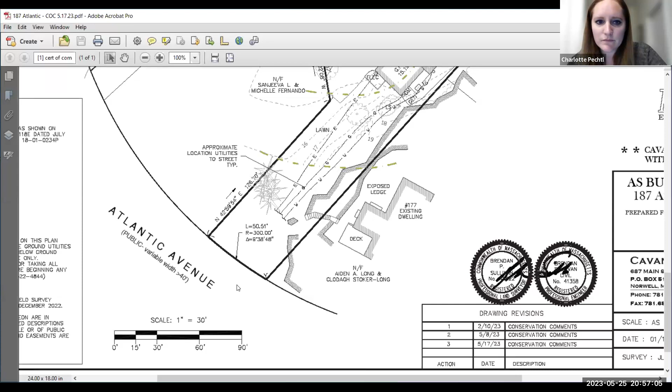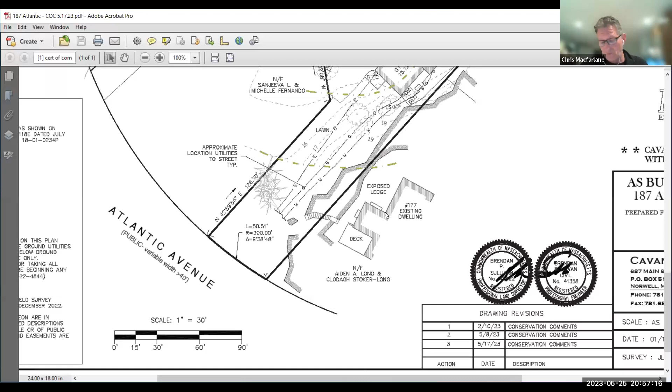Okay, any other comments?

I'll make a motion to issue a certificate of compliance for order of conditions associated with NOI 1915 and stormwater permit 1918 with our standard conditions, as well as a condition that the operation and maintenance plan shall reference the sump pump canister, that it shall always have a lid tightened down.

Do I have a second? Second. Motion and second, we'll take a roll call vote. Tom Bell, aye. Kathy Berigan, aye. Chris McIntyre, aye. Chris Macfarlane, aye. That vote passes 4-0.